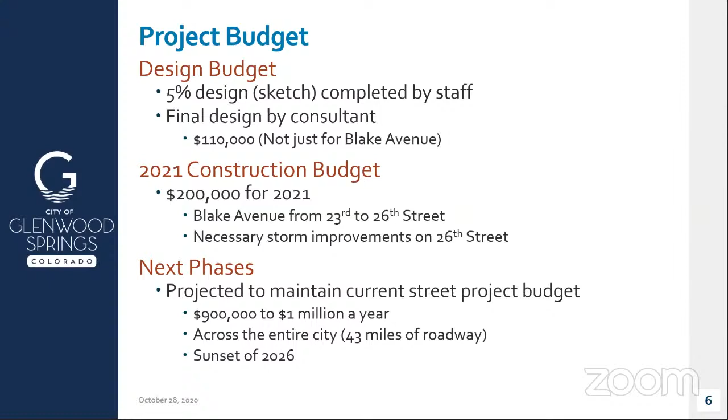So the phasing that we're looking at would be: phase one would be improvements to Blake from 23rd to 26th. Then we would have improvements to Palmer Avenue, which are not as extensive. The roadway there is in decent shape in most locations, so it would be some striping, potentially some addition of asphalt, items like that.

And then 26th Street, we do need some significant improvements there. It is not in great shape, as I'm sure most of the neighborhood is well aware. We need to replace some of the curb and gutter. It's a really steep road, so that one's going to be a little more involved.

And then phase four would be 26th to 27th to finalize that connection between what we've done on 26 to the new development that's coming in off of Palmer. And then the new developer is putting in improvements along Blake Avenue past 27th Street.

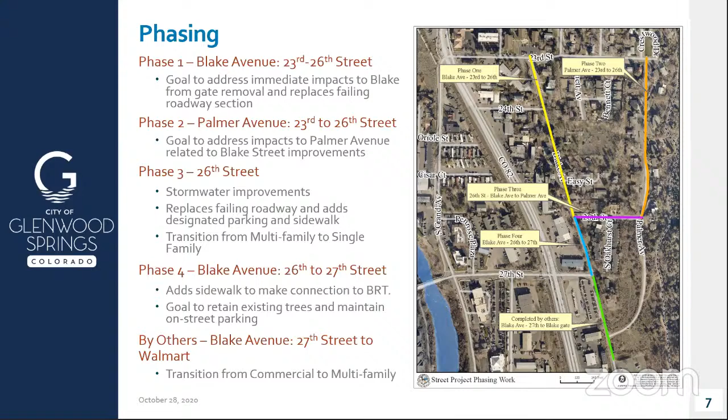So this is a little bit preemptive, but this is one of the really rough estimates that doesn't include a lot of items that we would normally need to consider. For phase one, I'm getting about $266,000 for these improvements, for probably one of the more minimal options. So keep that in mind when we look at these.

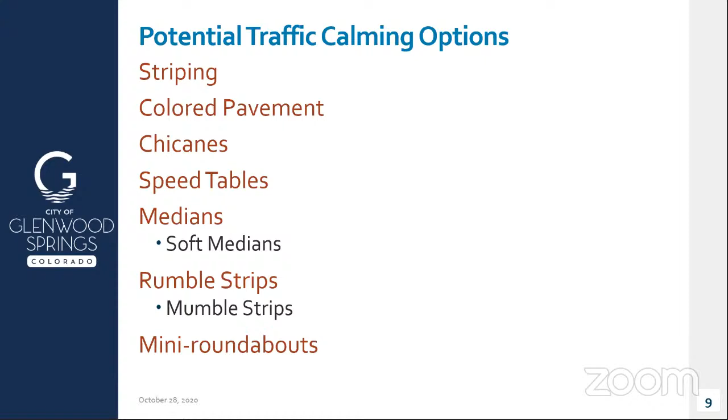So potential traffic calming options. We can do a lot of things with traffic calming. There's a lot of options to go forward with, and some are more effective than others. We have striping, colored pavement, chicanes, speed tables, medians, rumble strips, and roundabouts.

So striping can be a lot of things. You can widen your striping, you can add parking in a bike lane, you can add colored striping, you can add sharrows. These have a lot of benefits, but they also have a lot of drawbacks. We tend to have to repaint about yearly, and in some cases it needs to be painted about every 6 months. The plows do wear our striping pretty quickly.

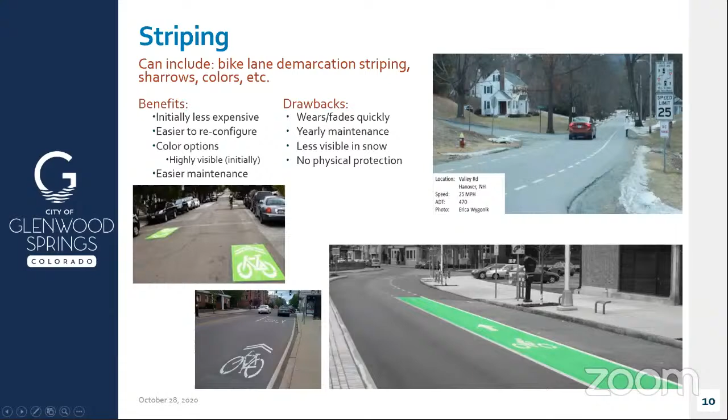Colored pavement does come with an additional cost, but it can be really effective. It's also a lot easier for us to maintain. We don't have to worry about having to restripe things. The color lasts a long time, and it is way visible. I think a lot of people take notice of colored pavement.

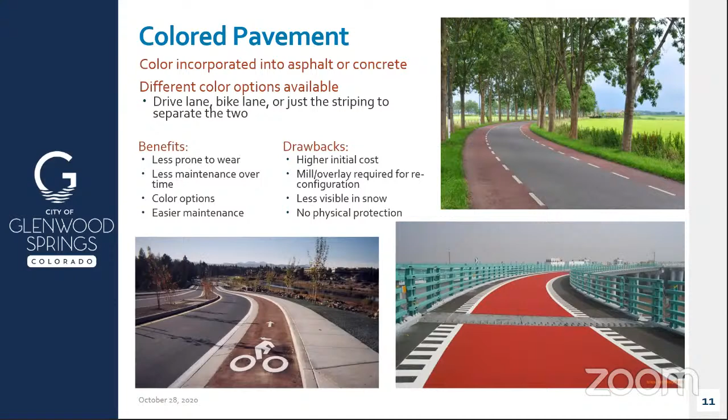Chicanes are basically like, they use them in a lot of speedways in racetracks, but it's a bump out in the road that kind of diverts your attention. So it slows people down because they're trying to avoid an obstacle. You can do these with islands - this is more of an island in the median in the middle. You can do it with striping, but striping is a little less effective because people can just ignore it, or if there's bad weather it gets covered up and people don't see it. But it can be really effective.

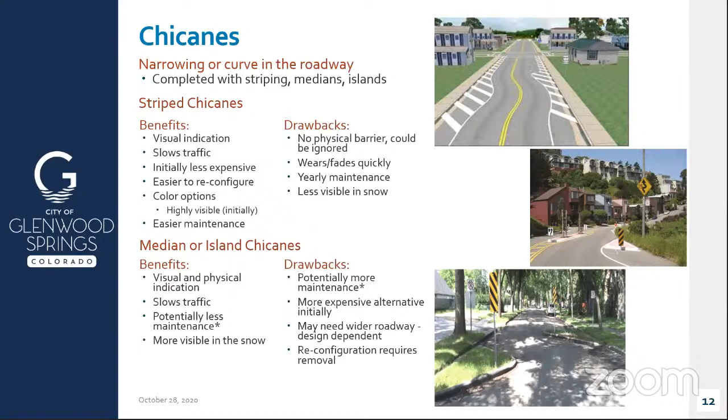Speed tables, we have a few of these around town. We have speed humps, we have speed bumps, we have speed tables. Generally, speed tables are mid-block, and they facilitate a pedestrian crossing. They can be in color, concrete, they can be striped. It can be hard to manage our drainage around them, and that drainage causes maintenance for our street staff, but they definitely slow people down.

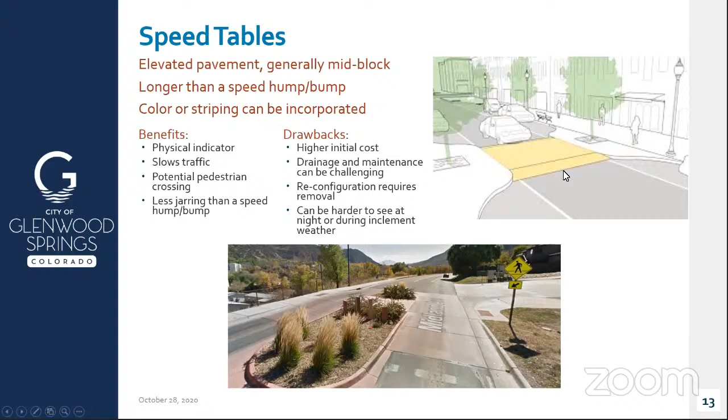So medians, we have a lot of medians throughout town as well. Some are bigger than others. They can be landscaped. There's an item called a soft median, which is done with pavers or stamped concrete. You can do stamped concrete along with the median. They kind of give you that narrow road feeling, and you can combine them with elevated crosswalks, striping, and a lot of other options.

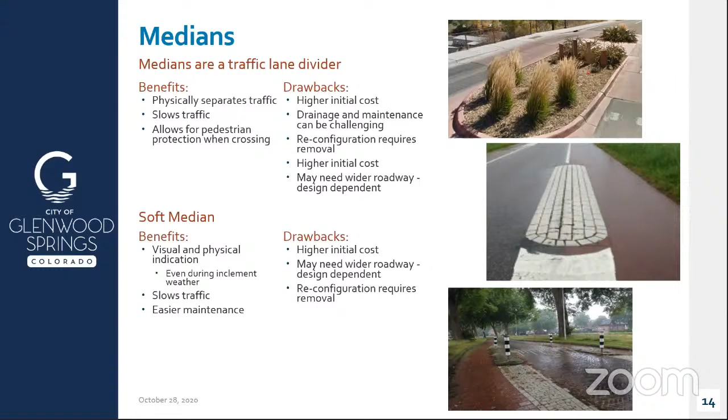Rumble or mumble strips, we do not have these around town. I think the biggest deterrent from rumble or mumble strips is that they cause noise, and there can be a lot of complaints from neighbors about the noise that they cause.

The mumble strips are a new item that I was introduced to when I went to a local road safety planning conference. I think they use them a lot more back east when there's a lot of snow, when you can't see the lane striping as well, you can at least feel it.

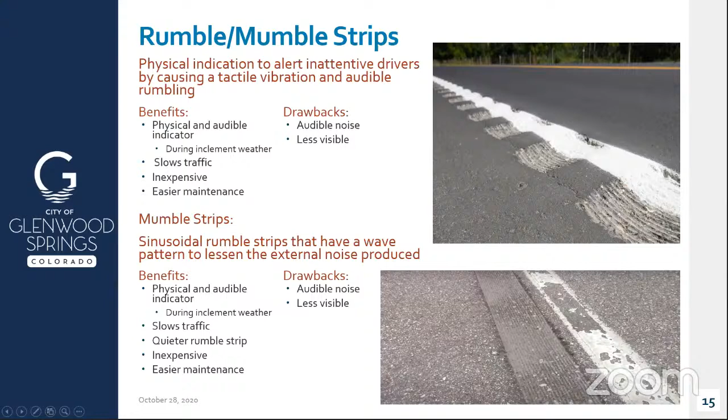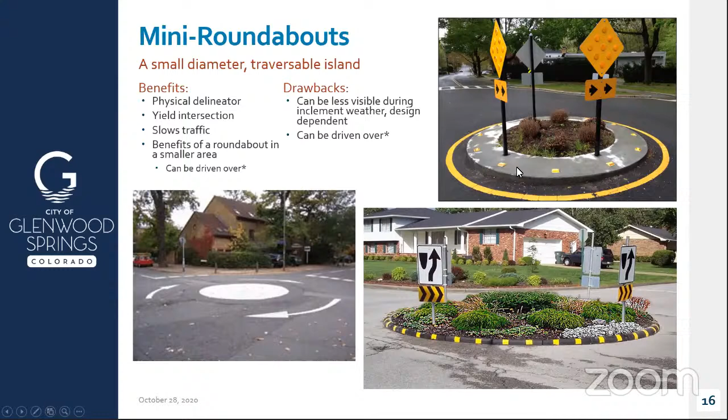And then mini roundabouts, they can be a lot of things. You can do them with striping, you can do a mountable roundabout, you can have beautiful little landscape areas. They're effective, just as effective as a normal size roundabout in most instances, but they can fit in a neighborhood street.

So with these improvements to Blake Avenue, we can anticipate an initial increase in traffic once the gates are removed. That spike is likely going to happen. And if we've done our job correctly and put in traffic calming that's really effective, that ADT should decrease and stabilize over time. We would likely still see congestion during high congestion times on 82, but that happens anyway.

The way we're going to monitor the success of this traffic calming and design is we'll have to take traffic counts, evaluate the speeds of people driving down the road, document our crashes on these roads, and also go out and witness it in person. We really need to look at the quantitative data over qualitative. These numbers speak a lot louder than someone's perceived success or failure.

I'm sure many of you remember when the roundabout at 27th Street was put in, a lot of people were upset about its effectiveness, but I've gotten a lot more compliments in recent months about how it's not backing up. People rarely have to stop going through there, and it's a lot faster than waiting at the light — fewer complaints now that it's settled in and people have gotten used to it.

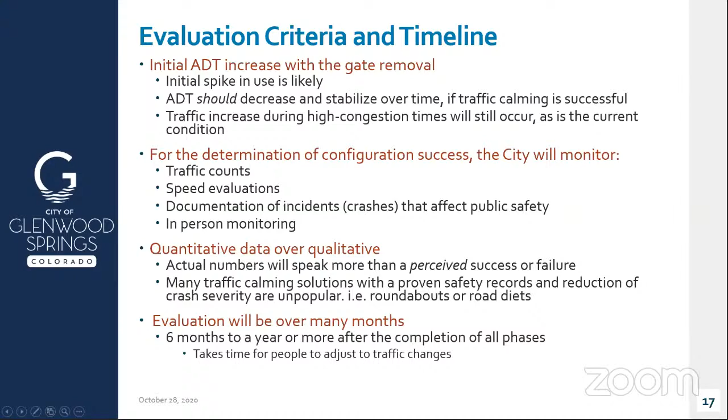So alternative number one is an advisory bike lane. We do not have any advisory bike lanes in town. This is an idea that again was presented in one of these local road safety planning conferences. They're recommended for neighborhood and residential streets, to give walking space to people and space for bikes.

The guidance says you want to do this on a low volume road, at low speeds. It should be a 2-lane road with no center line striping, with adequate sight distance, and in a place where there isn't a connection between biking and walking facilities. We want to avoid bus routes and truck routes, and put them on a road that's too narrow for normal facilities.

So as you can see, Blake Avenue really fits the bill here. It's a 15-mile-per-hour street, it's not striped, and it has good sight distances. It's identified as a bike route in our long-range transportation plan, and it has a very narrow right-of-way.

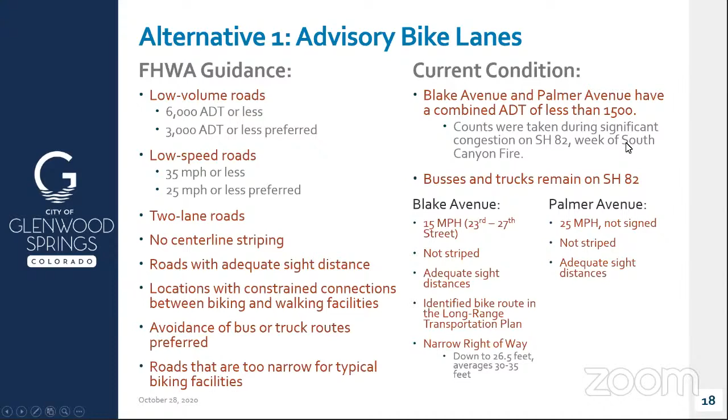Along with that, I did do counts during the week of the South Canyon fire, and the combined ADT between Blake and Palmer currently is less than 1,500.

So what's an advisory bike lane? I've included this video, and hopefully it plays for everyone and everyone can hear it.

Is that playing? Can you hear that? We can see it, Jessica. I can't hear it. That's going to play very well.

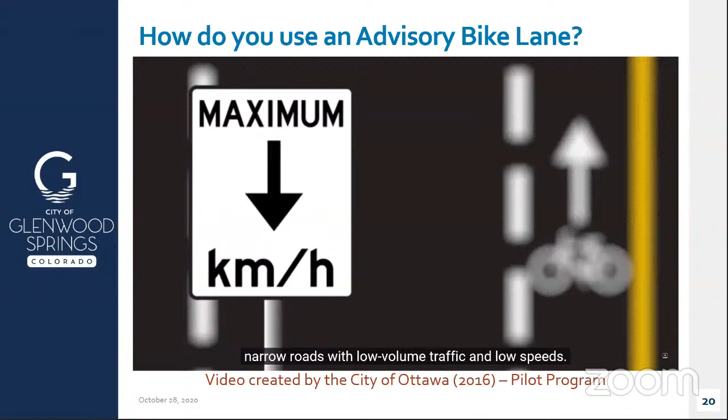Popular in Europe and in the US, the system is great for adding cycling lanes to streets where they wouldn't otherwise fit: narrow roads with low volume traffic and low speed. Here's how they work. Traffic from both sides shares one central lane. Cycling lanes are placed on each side of the road. When there are 2 drivers traveling in opposite directions, the vehicles move into the cycling lane to pass each other safely.

What happens if there's a bike in the cycling lane? Whoever is in front has the right of way. Vehicles travel behind the bike, but can then move back into the center lane when it is safe to do so. It is a whole new way for drivers and cyclists to share the road. Find out more at ottawa.ca.

And then the great thing about these is that they aren't just for bicyclists. They can be used by pedestrians.

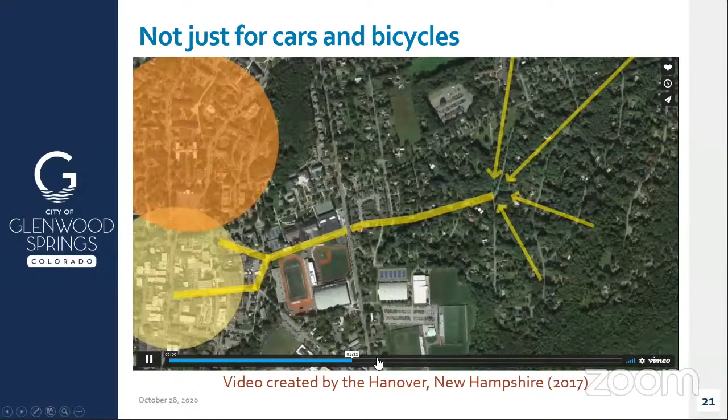So this is in New Hampshire, and this is more of an in-person view. So if you're the driver, this is how you would pass each other. And then as you can see, there's some cyclists coming up, and you stay in that middle lane, you avoid them.

This shows the perspective of a person walking against traffic. Here are some bikes passing the pedestrian in the shared travel lane. Cars wait their turn to use the road. Now that the bikes have passed the pedestrian, the cars can pass. This time, the car has time to pass when reaching the pedestrian. Then the oncoming car waits for the bikes to pass the walker.

The great thing about these is that they do prioritize pedestrians and bikes. Everyone is an equal user. You all wait your turn.

So Ottawa introduced advisory bike lanes back in 2016. They did it on a low volume street with less than 1,000 vehicles per day, and they had over 900 people participate in their planning study and look at this as an option. After these were installed, the engineer in Ottawa said that they had less than 10 people reach out afterwards. Most of it was positive feedback. The rest of it was to ask if it was a one-way.

This is so successful, they're looking at implementing another advisory bike lane around town on a larger collector road that does have more traffic. Both of these facilities do have sidewalks, so it's not as comparable for us since we don't have sidewalks on Blake.

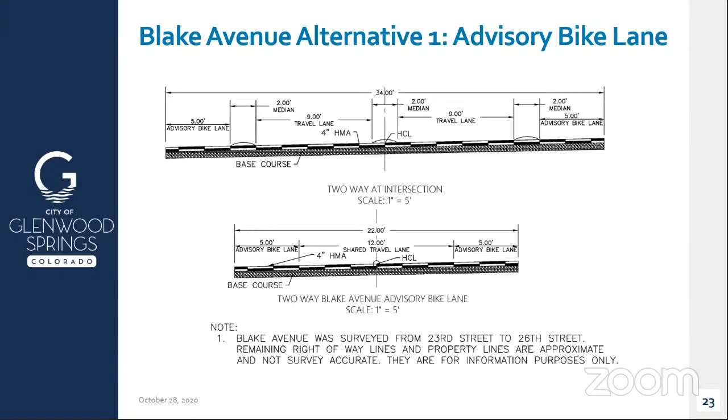Hopefully most of you have taken a look at the link online and looked at these plans already. We have 9-foot travel lanes at the intersections, and we split the traffic for the cars with a little median.

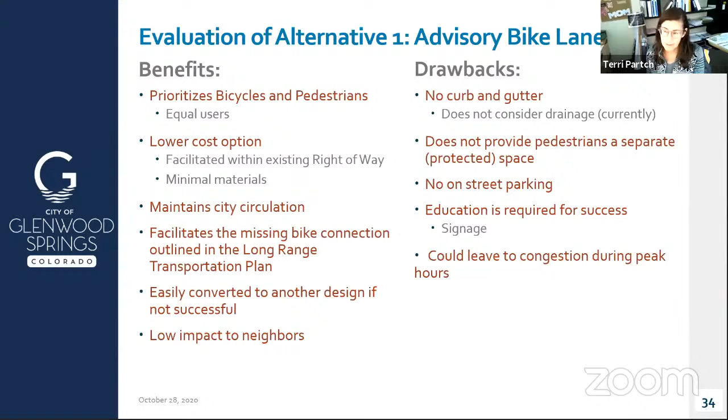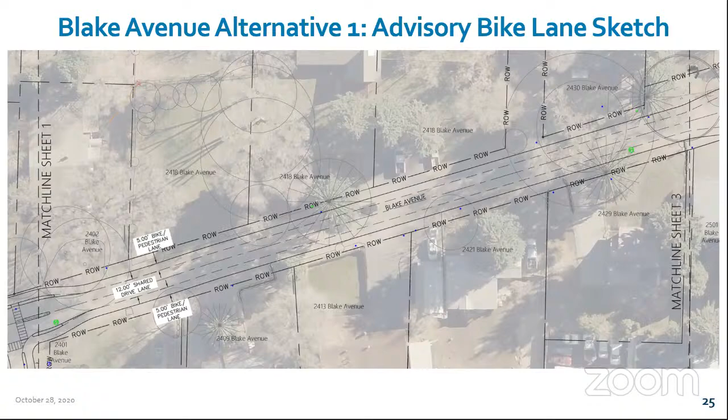So alternative 1A is a similar configuration. I didn't specifically lay this out.

We do need to maintain at least 20 feet for Blake Avenue to facilitate an emergency response. If for some reason we had to evacuate that neighborhood, Highway 82 was backed up, and we needed to get a fire truck behind Walmart to fight a fire, we need to be able to facilitate that.

So the consideration for that is Blake would be one-way southbound from 23rd to 27th. In that condition, Palmer Avenue would have to be two-way or one-way in the opposing direction for safety. We can't do Blake to 27th Street because what happens is Palmer Avenue and 26th Street essentially become a cul-de-sac. Everyone is forced to 27th Street and Highway 82 if they get to that intersection.

So if they're coming north or south, they would have to get on the highway. If we did that, CDOT would likely reevaluate the intersection, and we would be forced to do substantial improvements at Highway 82 that come with a significant price tag, potentially the acquisition of Carpet One, which is not a small number.

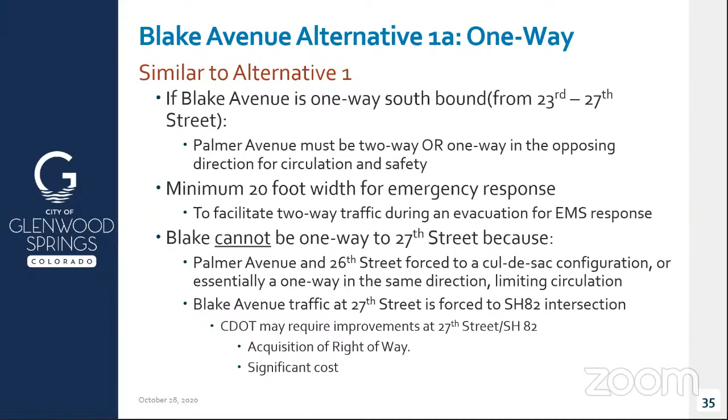So benefits and drawbacks. The southbound movement lowers the volume certainly, and discourages highway traffic from taking Blake Avenue. It is lower cost, similar to what our advisory bike lane facility would be. We could potentially facilitate a separate pedestrian facility, a sidewalk, and we could convert it to something else if it doesn't work. Again, it has low impacts to the neighbors.

The drawbacks are, again, drainage and bicycle traffic. This is a bicycle route, so we would have bicyclists going the wrong direction versus cars, and we would have to put in a lot of signage and physical barriers. I know we have a lot of people who go the wrong way on Colorado and Cooper — still to this day, I did it when I first moved here. It doesn't look like a one-way street.

And it does reduce our city circulation. We don't have a lot of options north and southbound — we have Midland, we have Blake, we have Palmer, kind of. There's not a lot of options for neighborhoods to get around. And this would increase Palmer Avenue traffic during periods of congestion. We saw it with the counts I took during the South Canyon fire — there was a significant amount of traffic being pushed to Palmer.

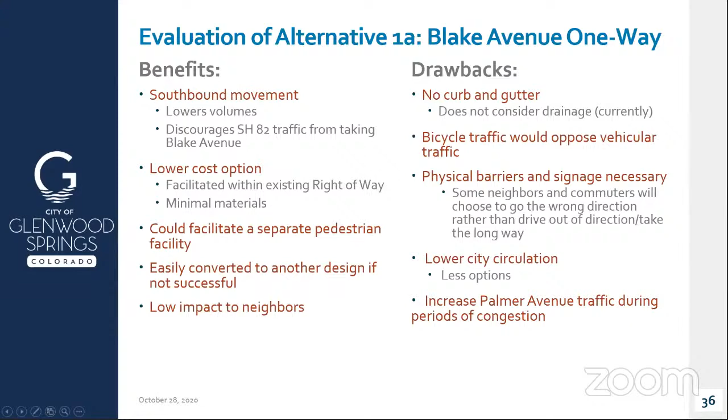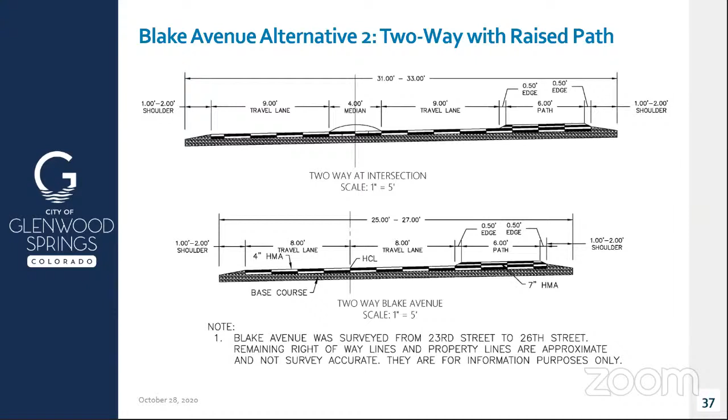So the next option we looked at was a smaller two-way road with a raised path. The pathway would be shared by cyclists and pedestrians. It's raised, about 3 inches, with a mountable curb, so a bike could choose to be in the driving lanes with a car, or be on the path, or go back and forth between the two if a car was coming and they didn't want to be in the way.

And then for Palmer, I would propose that we do the same facility with that raised path. Again, it gives pedestrians a place to be, and it's a physical separation.

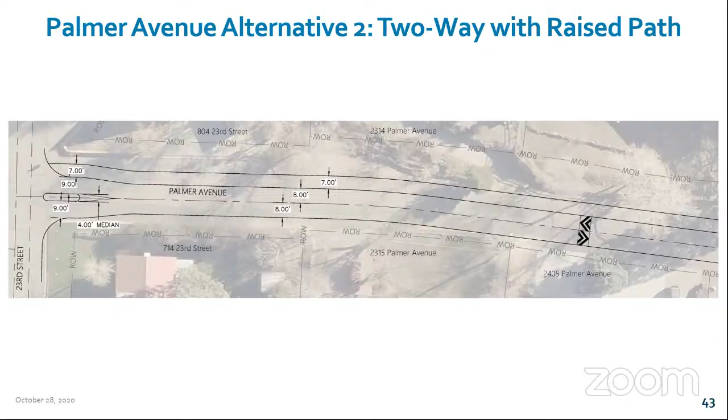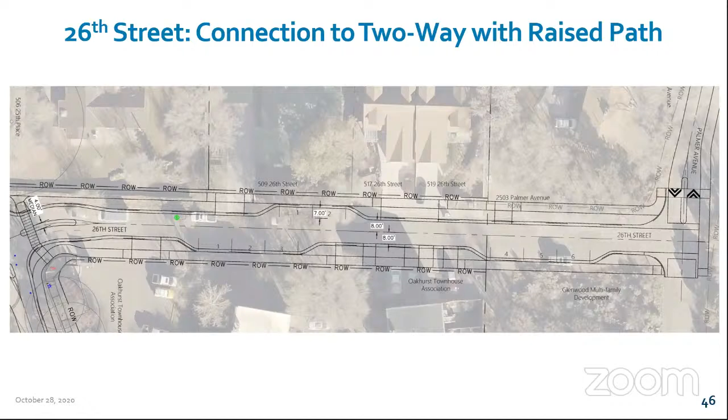So another crosswalk, and again on 26th Street I kept the same configuration. We really do need curb and gutters on that street, and we do have a little bit wider right of way there to facilitate sidewalks.

Benefits are it separates pedestrians, giving that vertical separation. Cyclists could choose to be in with cars or on the path. Again, it's lower cost, it fits in the right of way, and I would propose this with mostly asphalt. It maintains two-way traffic on all the streets and facilitates that bike connection. The separation is mountable, so a car could drive up it if they chose to.

We will have to look at the drainage. There's a potential that this would increase our pavement, so we may need to add curb and gutter and some drainage facilities. This is wider, so we probably wouldn't be able to maintain any on-street parking, and again there's the congestion during peak hours. It would be a little more difficult to convert to another condition if it wasn't successful, but it's certainly not impossible — we could mill and reconfigure it.

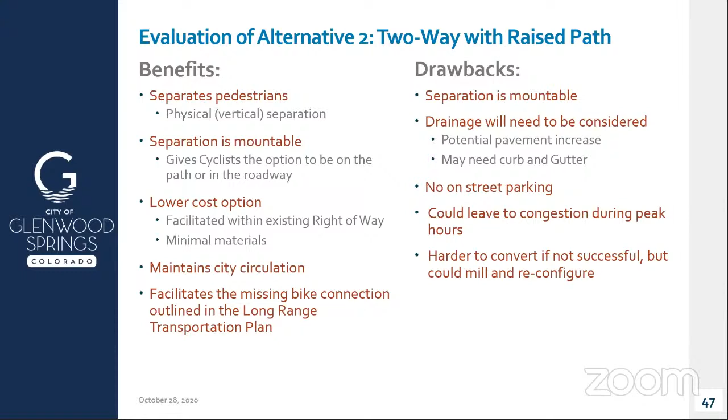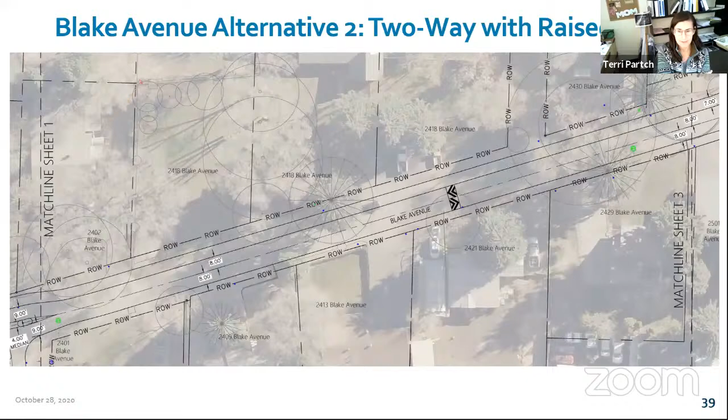And then one question about what are the triangle things? I'm not sure which triangle things they were referring to — maybe it's that. It's just striping, just to tell cars that they need to get over. And these are just striping, like what we have on Midland with those speed humps, to warn people that they're there.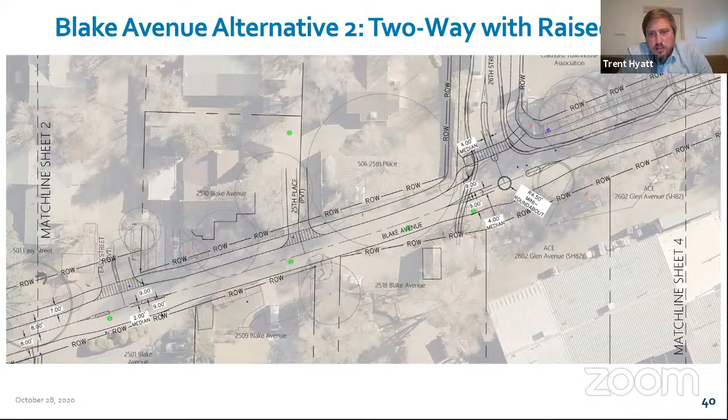So I think the preference is two-way. And he was also asking why we're not acknowledging the significant increase in traffic with the Blake Gate open. I think that we are, and that is the main issue we're trying to understand: how can we accommodate that increase in traffic as well as other modes like bicycles and pedestrians that are not currently accommodated.

Yeah, and with this sketch I did minimal traffic calming here. It's a pretty short stretch of road, so we could potentially put in chicanes, speed humps or speed bumps, speed tables. I do show a mini roundabout in both examples, but that could be changed to something else. I think we wanted to get a feel for what the neighborhood's thinking before we started investing too much into a certain idea.

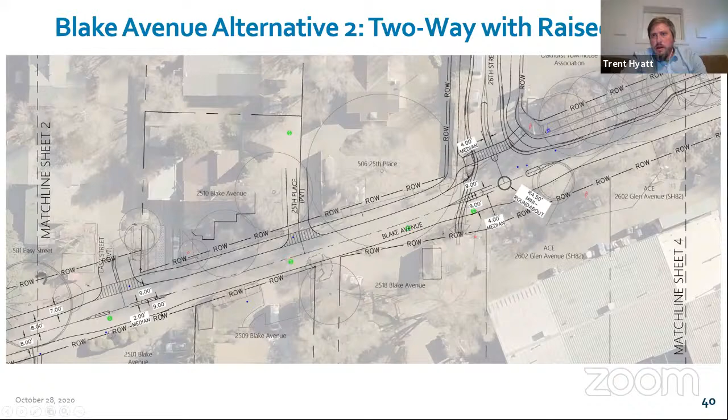Hi, I was just wanting to inquire. In the Q&A I put in, just to understand the cul-de-sac on 26th and Palmer better, what exactly you meant by that. But also, one of the questions is I didn't see addressed: do you remember at the city council meeting when Charlie Wilman suggested you one-way south 26th to 27th Street, which would create parking still, but people would have to enter from north to south. It would alleviate, I mean, we'd still have traffic coming through the neighborhood, and everybody from the north driving south would be able to get down to the Marketplace Shopping Center. But considering we don't have very much budget and all of this is going to cost so much to change all these streets, would it be better to just, even if temporarily, one-way from 26th to 27th until the city of Glenwood recovers from all the COVID financial distress? I just wondered what happened to that option or that conversation.

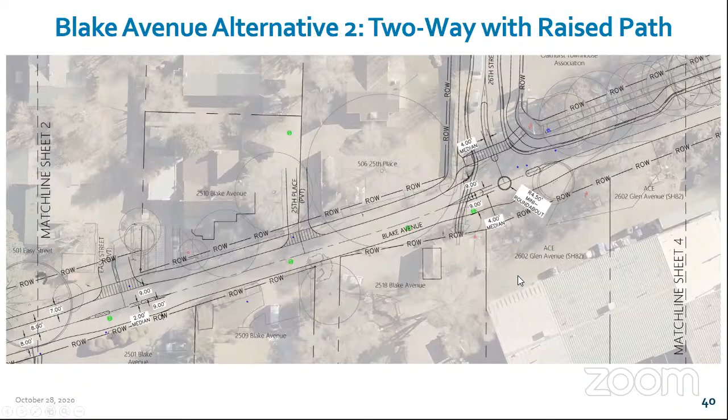Jessica, you have a request to put the diagrams back up, and I'm not sure which diagram—the advisory bike lane, I think. Hopefully that works.

Jessica, I actually think the question was about the diagrams, and I'm not certain which one. And then we do have five questions, so.

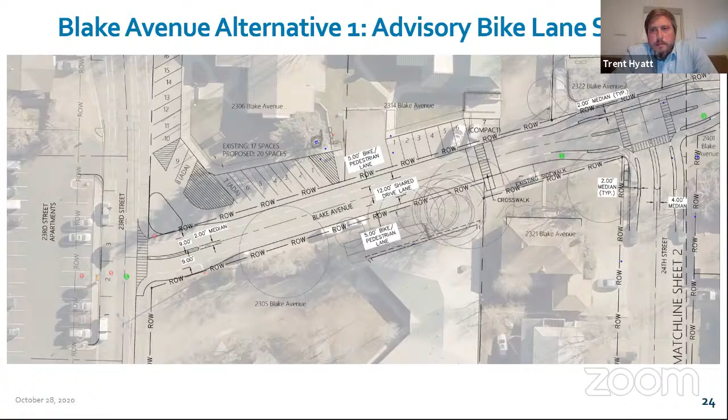Sure can, thank you. Yeah, I'm Annie and I'm an owner on Easy Street. And where Easy Street meets Blake is one of the very narrowest portions of Blake. So I'm wondering, it's hard to tell from the diagrams, if the improvements are planned to take advantage of that full right of way, which would mean Easy Street would have to move their mailboxes and folks on the other side would be losing some of their yards. I guess I'm confused about that and would appreciate an answer.

Yeah, so I tried to keep most of the roadway within what was existing. There's a little bit of encroachment here, and I'm not sure—it doesn't look like the mailboxes are showing up on here. But right here is the existing curb line, and here, and then the path would be in this location. I know you guys have some storm drains that go this way. So, unfortunately, it would be great if our right of way was that wide throughout the whole corridor, but it just isn't.

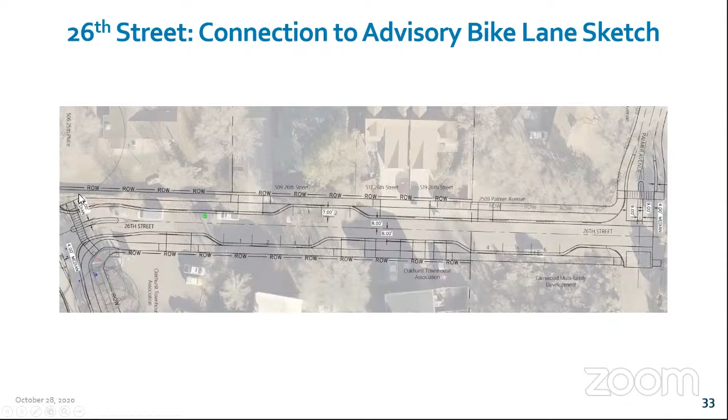And the idea at the intersection, regardless of what option is chosen, I think we need to align this intersection better, so that it's perpendicular with the traffic flowing north and south - I think it's shown better in the Blake here. So this does give a chicane feel to it, and with a mini roundabout, or even just the medians and some raised crosswalks, I think that would help with the speeding down there.

Now, in the wintertime, it will be a challenge. I know there's a stop sign on Blake here currently, so depending on snow and ice, it could be difficult, but I think it's difficult currently just because of the condition of the road.

Just to follow up a little bit, Trish, we are going to send out a survey with some questions about everything that you've seen tonight, and I do know that a lot of this is probably tough to understand in quick slides, but I know that Jessica and Terry are also happy to follow up with explanations if need be. So feel free to reach out to them.

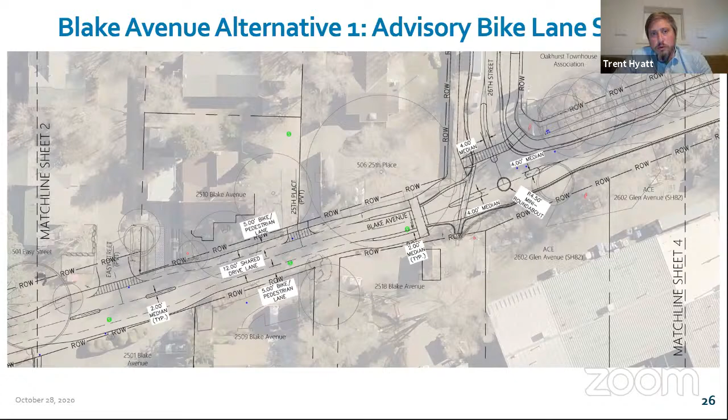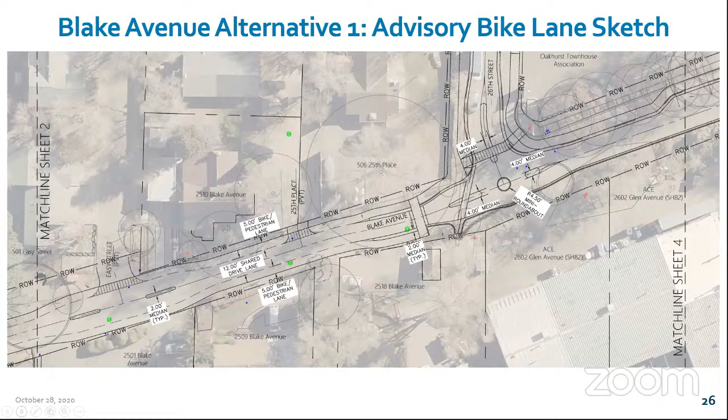Okay, what was your next comment? My other question was about the intersection of 27th and Highway 82. To me, the writing is on the wall that this is going to be a more and more heavily used intersection no matter what. And I'm a little surprised that the RFTA people don't squawk a little bit more about how awkward it is for their buses to get in and out of there.

So I guess my thought is: save the money on all these improvements to Blake, make it a one-way southbound between 24th and 26th, and put that money toward the inevitable improvements needed at that 27th and Highway 82 intersection.

And maybe I'll let Terry answer the RFTA question, but again, we still have a minimal amount of pavement we need to put in there. So the increase from a one-way to a two-way is, in the grand scheme of things, not as relative as the acquisition of Carpet One, which would be in the millions.

RFTA is concerned about the BRT access onto 27th. It's constrained today because of the driveway location that buses have to use to access the turn lane. Having additional traffic on it and channelizing more traffic from one-way configurations, I think will really degrade the service of 27th Street over time.

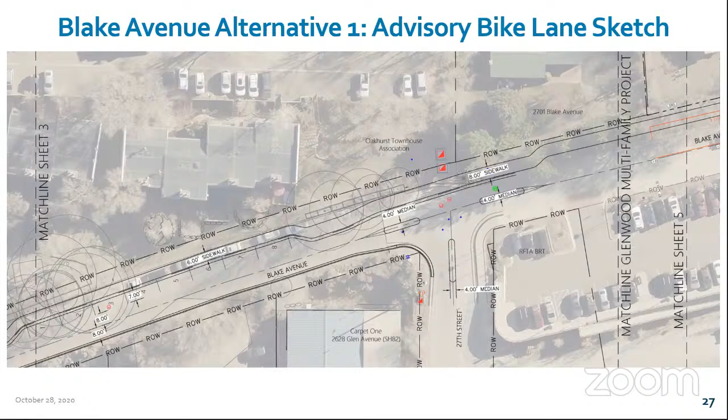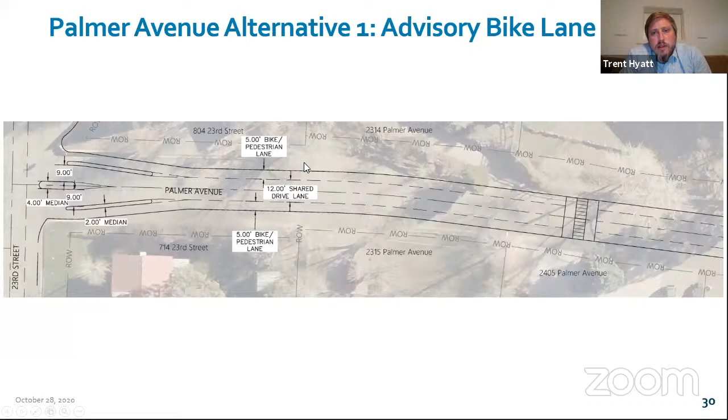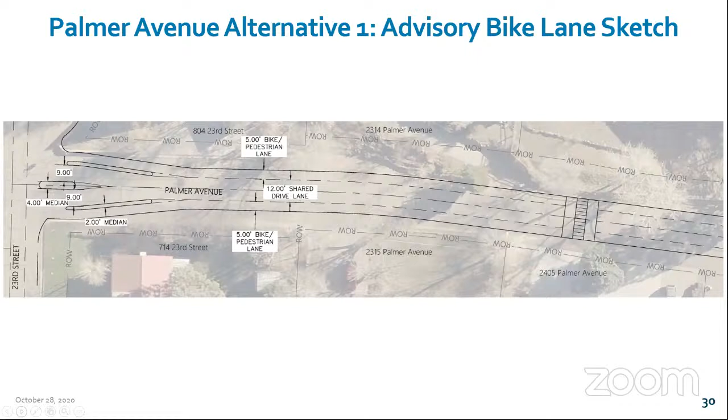What about Palmer Avenue? Have we considered an advisory bike lane alternative for that road? Yeah, I did put together one similar, and these are available on the website as well. Again, it takes this intersection and divides it with some medians, a speed table or speed hump, as well as shared bike lanes. Palmer will be a little more challenging because there's a lot of asphalt out there already. So I think on Palmer this could be done with some striping and minimal improvements to the roadway, but I do think we would have to stripe the edge of the roadway or potentially remove asphalt to really keep that narrow feeling for drivers and slow them down.

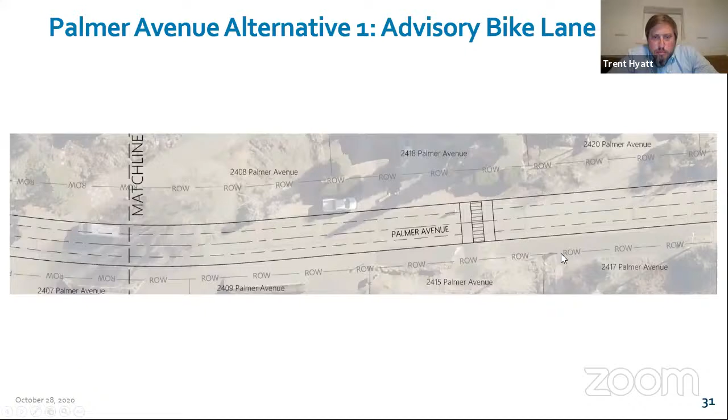Dick and Jan ask, have we considered a mini roundabout at the top of the 26th Street hill at Palmer? They wonder if this would eliminate the blind summit at that intersection.

No, I did not. I think roundabouts are a little bit hard because you want a flatter intersection to install them in so people can see, and you can't really see around the corner at Palmer. But that being said, it really is a continuation of Palmer at 26. So we could put in a median and potentially not make this more of an intersection. I know this is going to be a trail in the future, but maybe do a radius here and improve it in that manner.

Okay, let's see, back to you, Annie. Sorry to cut you off earlier if I did. That should be okay, I'm able to talk.

I just want to say again that when my daughter was in kindergarten and first grade, we lived on Easy Street and had to walk down to the school bus stop at 23rd in front of the apartments near Alpine Bank. I was actually extremely grateful for the condition of Blake—potholes, ruts, mud, all of that mess—because it slowed people down, since we had to walk on the road because it's so narrow. I think that's clear to everybody now.

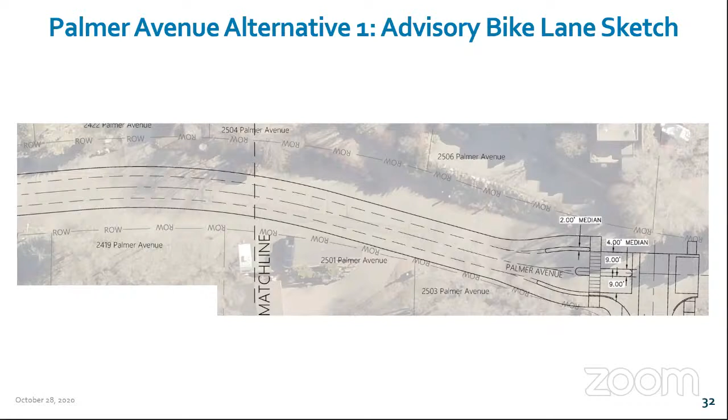Anything else from staff? Yeah, I want to thank everybody for their time, and please keep in mind these are just sketches. These can change—this is just an idea. We can modify it with traffic calming. Please ask questions; I know I blew through these slides really fast, and part of that was because I knew there was going to be a lot of discussion and questions that everyone was going to have. We really wanted to spend more time discussing with everybody and getting a better feel for everyone's concerns.

Jessica, I think we should upload this slideshow to the website too, so everybody can thumb back through it at their leisure. I also saw that Steve Smith, who is on our Transportation Commission, as well as Lee Barger, are listening in on this discussion. Steve has asked if we could forward any written responses to the survey to the Transportation Commission—they would like to see them by Monday so they have a chance to look at them too. We'll accept comments all the way up through the time we go to council, but it's helpful for the Transportation Commission to hear this discussion and then have any written comments you guys had.